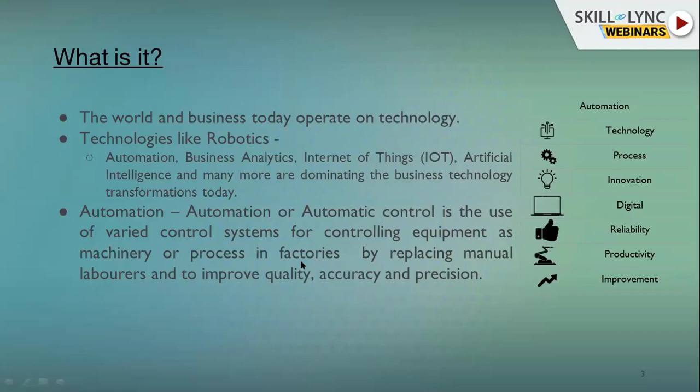Let's look at an overview of the evolution of robotics and automation. From 1961 till now, this figure depicts how, according to needs, there was an evolution of robots and automation in human life. In 1961, the first robot was installed at General Motors, and the robot's name was Unimate.

In 1969, Trallfa in Norway started the first commercial painting robots, which we now see in every car or automotive industry. Then in 1972, robots were installed in production lines across the European Union and other European countries.

In 1982, IBM developed an automated manufacturing language for its RS-1 assembly robot. IBM created a robot, and then created a programming language to operate it.

Then in 1996, KUKA, a German company, launched their first PC-based robot control system. Going to 2007 and 2009, Motoman launched super-speed arc welding robots, which reduced cycle time by 15%, and it was the fastest welding robot in existence.

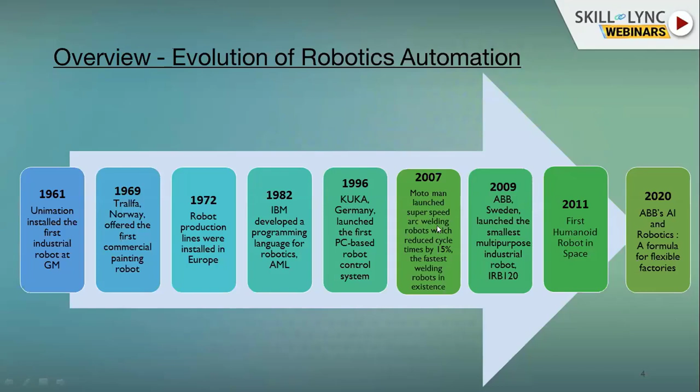So we can see that in the span of 50 or 60 years, or more recently in just 1 or 2 decades, there has been a major change in manufacturing systems. Factories are going automated.

Let's talk about the need for automation and robotics. Why do we need it?

We do have traditional machines, then why do we need robotics and automation?

We need robotics and automation because of major factors, the first being lower operating costs. Robots can perform the work of 3, 4, 5 people or more, depending on the task. In addition to saving time and labor cost, there is also energy savings due to lower heating requirements in automated operations, and streamlined processes which increase accuracy.

The next factor is improved safety of workers. That means there is an automated cell that removes workers from dangerous tasks, so robots can perform all dangerous tasks. This saves human lives, since the robots are already there in their particular automated cells, providing enough safety to save lives.

Then it reduces factory lead time. That is very important in any production. Lead time is a very important thing while performing any production in a company. Automation can keep the process in house by improving process control and reducing lead time significantly. Because from start to end - if we think of an iPhone manufactured from the starting of the circuit PCB to the whole iPhone - there are many automated things involved.

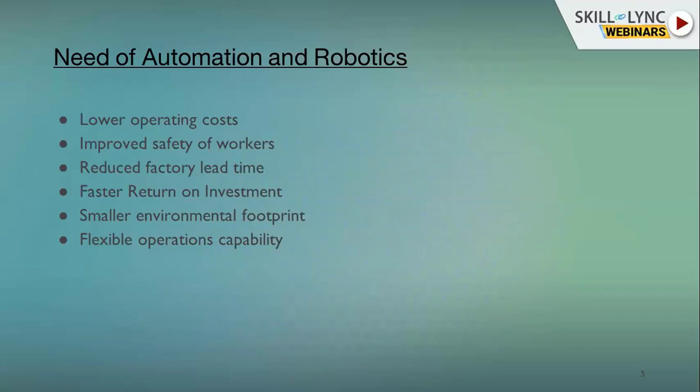Let's see the fundamentals of how the robotic industry is divided. The robotics industry can be separated into service and industrial robots. Service robots are further segregated into commercial and personal robots, while industrial robots are segregated as manufacturing. Let's talk about service robots first, then industrial. Commercial robots are used to perform a service in the environmental industry, and personal robots are used in private households. We will take further examples of this.

Let's talk about industrial robots. Industrial robots are defined by their use in a manufacturing environment. Industrial robots have about two times more market than service robots, because they are used in smart factories, which causes high market growth in industrial robots. Key market drivers are five major countries, and there are many advantages of smart factories, which include flexible production, optimized logistics, and customer-focused solutions.

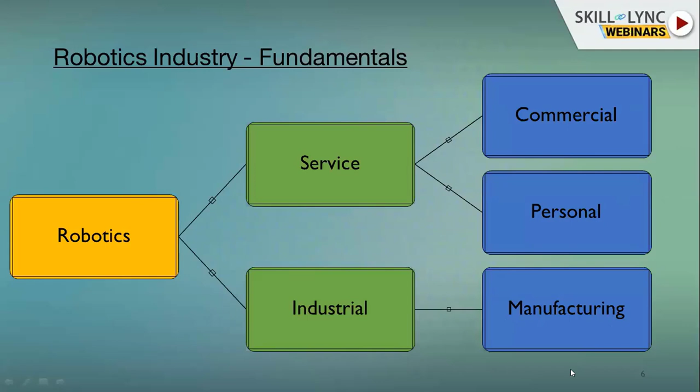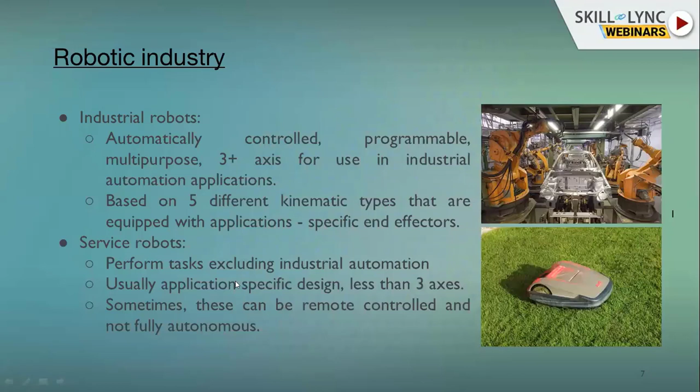Let's dive further into the robotic industry. Industrial robots, as I mentioned, are automatically controlled by teach pattern, and are programmable according to the application. An industrial robot has three or more axes for use, which can make flexible operation with greater reach, based on five different kinds of kinematics, allowing flexible operations according to the applications. Service robots perform tasks excluding industrial automation, and are typically application-specific in design, with less than three axes. Sometimes they can be remote controlled and not fully autonomous.

So let's see a couple of examples. Automation in day-to-day life, automation in agriculture, like agricultural robots which we talked about earlier. We all know that every sector is having automation right now, so let's talk about agricultural robots.

There are a couple of robots already working on the field. I will talk about the ecoRobotix, which is specially manufactured and targeted to spray the weeds in the field, to remove the unwanted plants. This robot has a camera vision system, by which it identifies and then sprays the weed.

The other is Naïo, which has the ability to assist during the harvesting. The other is the agro robot, the fruit picking robot with the ability to identify ripened fruits. For example, this company has the application of strawberry picking. As I told, the robot has the vision system, so it recognizes the ripening of the fruit by the color. If it is green, the robot will not pick. If it is red, it is going to pick. So there is an application of fruit picking also.

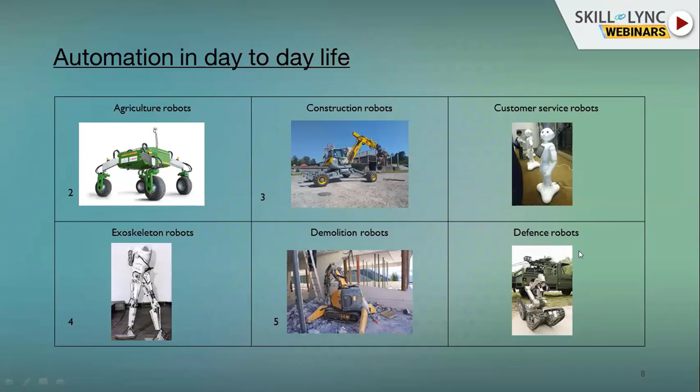This is very interesting because there are many progressions going on in this field. There are predator drones already developed by some countries. There are robotic armed vehicles for the safety of the borders. And there is one organization known as DARPA, an US organization for defense, which particularly looks into automation and robotics for the military of US. They have also developed many small and big robotic systems for military uses.

The next is the material handling robot. We all know that in the automation line, like if we talk about some factory automation, from start to the end - let's talk about car production - from start to the end, every work has been done by robots, and there are material handling robots which keep everything streamlined.

Humanoid robots. We all know that Sophia, the first humanoid robot, gained recognition in Saudi Arabia as a human. And there is also one robot developed by Boston Dynamics company of US. The robot's name is Atlas, and there are many other humanoid robots developed.

Cleaning robots. In this current time of COVID-19, cleaning robots have taken a good market cap. A cleaning robot, first, if I say, is like an automated mop which cleans the floor. But now, after COVID, there are many other robots developed, which also have laser cleaning or other cleaning systems.

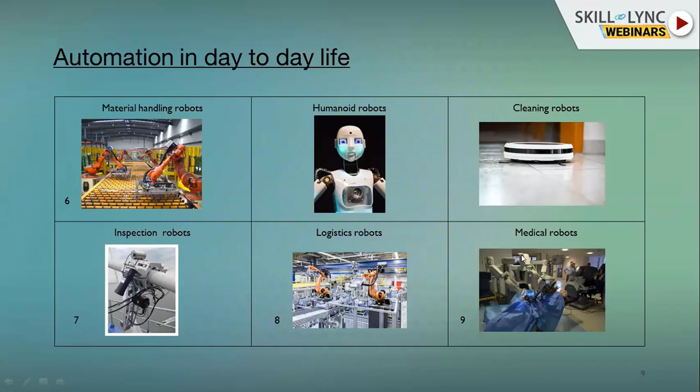Medical robots. In this figure, we can see robots performing surgery on humans. This can happen, and some of this already exists, so it is very useful and good in this sector.

Collaborative robots. As I talked earlier, a robot that collaborates with humans is a collaborative robot, or cobot. These are very useful robots because they are flexible, and they might be small or big size according to the application, but they are very flexible and can help with every small task.

Going to space robots. Recently we all know that India, UAE, and USA launched missions to Mars, and they all have their robots. Just last week, or maybe a week before, the USA launched their Perseverance robot for the Mars mission. So space robots are also taking a place, and it is very useful in this field.

Packaging robots are now very common, and small industries have also started using them because of the efficiency and work done by these robots. It's very easy and convenient for manufacturing.

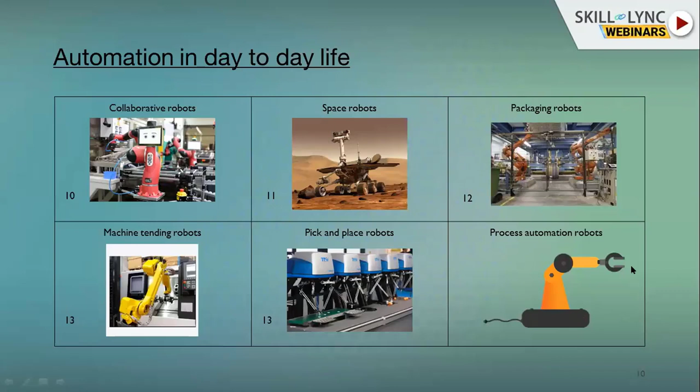Machine tending robots help with small human tasks. Pick and place robots perform a very basic but very important task, reducing the monotonous work of humans, and they are useful in every single sector and industry. Process automation robots include all the robots in the process, keeping humans out of it, as most of the process is done by automated robots rather than humans.

Now let's talk about the types of robots based on the movement of joints and link arrangement. There are five different types of robots.

The first one is the Cartesian coordinate robot, also known as the XYZ robot. It has three joints, X, Y, and Z, giving it a simple configuration compared to other types, with three joints and three axes. Its basic uses are pick and place applications, material handling, 3D printing, and carrying high payloads. I want to talk about payloads: robots are recognized by their reach and their payload. Reach is the maximum circular motion or arm area the robot can cover, and payload is how much weight it can carry.

The advantages of this robot are high accuracy and high speed. The operating cost is less, and it has a simple operating procedure. The only disadvantage is it requires a large volume of space to operate.